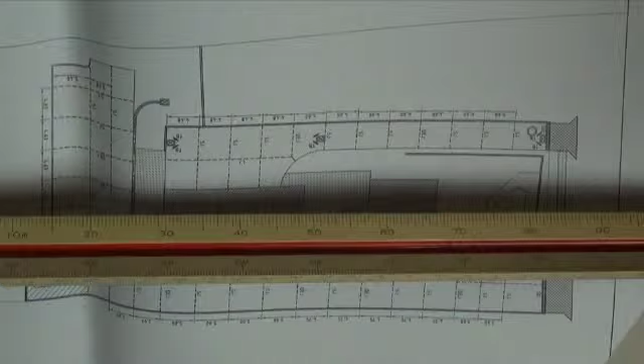One of the best things you can use is a scale rule. You'll notice here I have a scale rule with different kinds of scales. I've got 1:500. All you have to do first is check to see how effective it's going to be. I'm choosing a small section, from this point here to that point there, and we're going to see that's 15 metres.

Now that doesn't quite match up. This one's coming off at 1:500 as being about 18 metres, so that's not the right scale. Let's try the 300. No, it's coming off as 10 metres now, or 11 metres.

1:400 scale. It's close, but not brilliant. It's okay, it's 1:400, so it's close. You could possibly use that, considering how close it is. We've got 4.5 versus 5 metres, and 14.5 versus 15 metres.

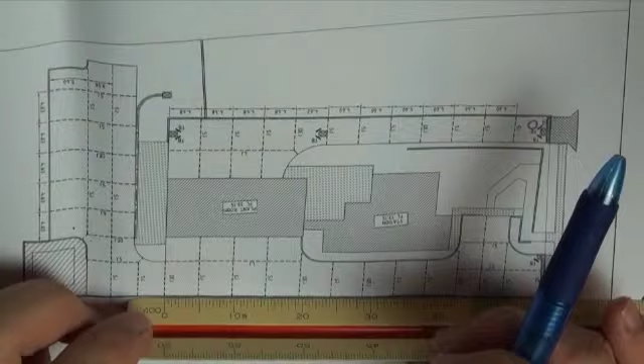Let's try the other scales, there might be one that's a little bit better. What have we got? One here at 1:200. We notice that comes in about a little bit touch over 7 metres, so that shows something similar to the 1:400.

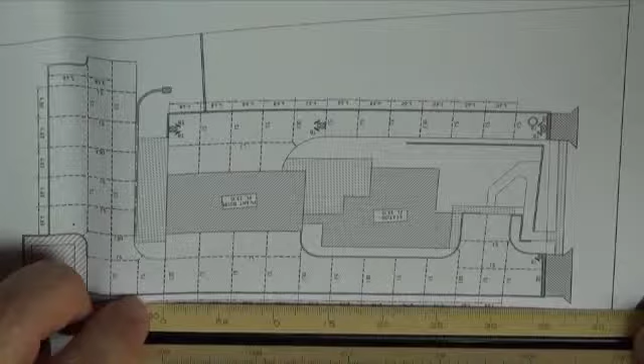1:250, we've got another one. What have we got? That's about showing about 9 metres there for that same distance of 15 metres. 1:100, and that's way out, as you can see.

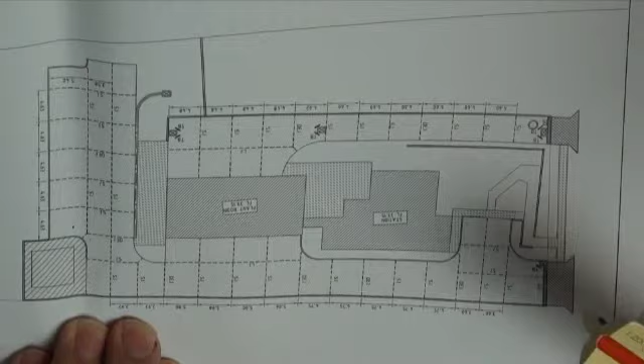So if you're not happy with that, you could possibly get away with the 1:400 scale if you wanted to. That's reasonable. It's not brilliant, but it's reasonable, and you could possibly use this. This is actually blown up onto an A3, so it sort of shows that.

Another way to get a little bit more accurate is to simply use a piece of paper. So here I am, I've got a piece of paper, and I'm going to mark off a couple of measurements. I want to mark off one that's 5 metres. That's a 5 metre measurement there. Sorry, this is upside down for you, but it's effectively 5 metres there.

Now I've got another measurement over here at 3.97 metres. That's pretty close, that's fairly close. So we might say that's about equal to about 4 metres. It's marginal, the 0.03 of a metre compared to the 4 metres is really quite small.

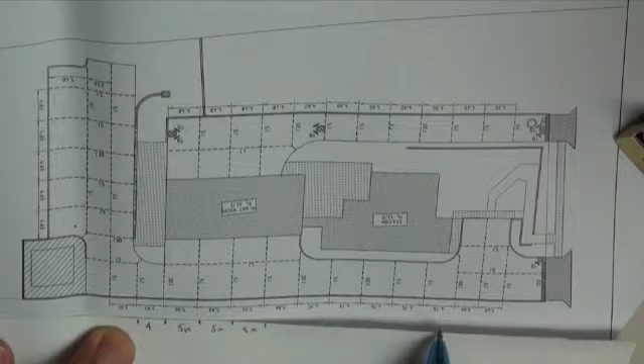So now we can use some of these measurements to get an idea of some of the other measurements around the place. I've got a 4 and a 5 metre one here. I might just see if I can find one more. 3.6. I might go over to this 3.6 over here and measure that one off as well. So there it is, 3.6 metres. Okay, so we now got 2 or 3 measurements.

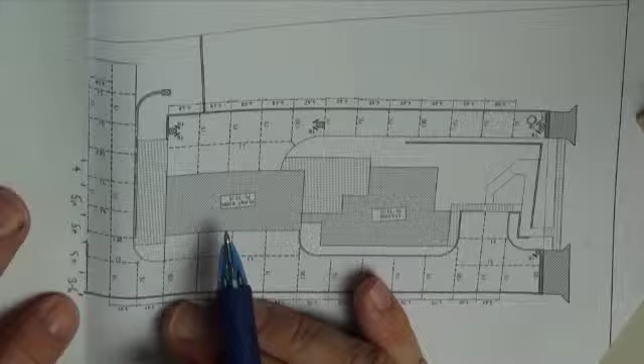What I like to do now is just run these measurements around some of these ones here and go, okay, well, how close are we on this? You see this one right here, we've got it's past 5 metres, it's probably closer to 5.5, maybe 6 metres. Let's see if I can get a 3.6 in there. No, it doesn't quite work that way. So we could say that measurement there is very, very close to 5.5 metres.

Looking at that, what do we got here? What's the measurement here? We've got a 3.6 and a 5 metre there. That's not quite, what else have we got? Two 5s together, oh, it's very, very close. You see that measurement there? Very, very close. So that'll be close to 10 metres, that measurement there.

Okay, and now we can start doing some different measurements around the place, looking at the ones we haven't already got. There's another measurement over here we haven't already got. So what do we got? We'll try 9, well, that's pretty close, isn't it? 9's not too bad. How does 10 look? Oh, that's very, very close.

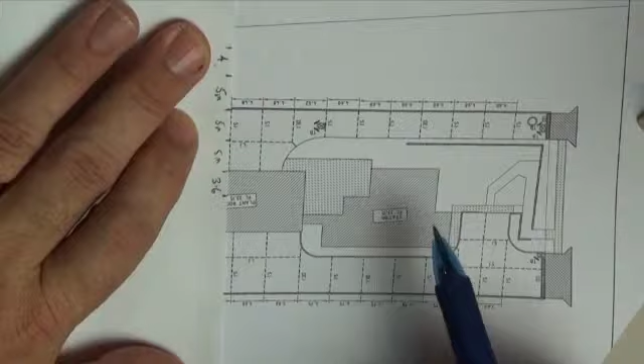So you can see how closely you can get by estimating some of these measurements. All you need to do is jot down some distances and consequently some areas. That's how you can do measurement. If your scale rule doesn't work, if you find it's not all that brilliant, you can just use a pen and paper and scale around using the pen and paper, and it's pretty good. You'll be within 5 to 10% accuracy.

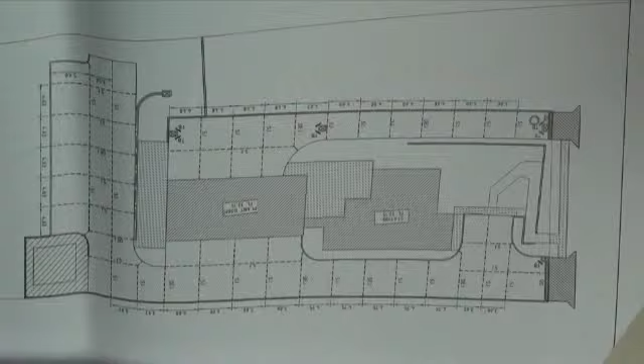So next I'm going to show you how to do things on the screen.